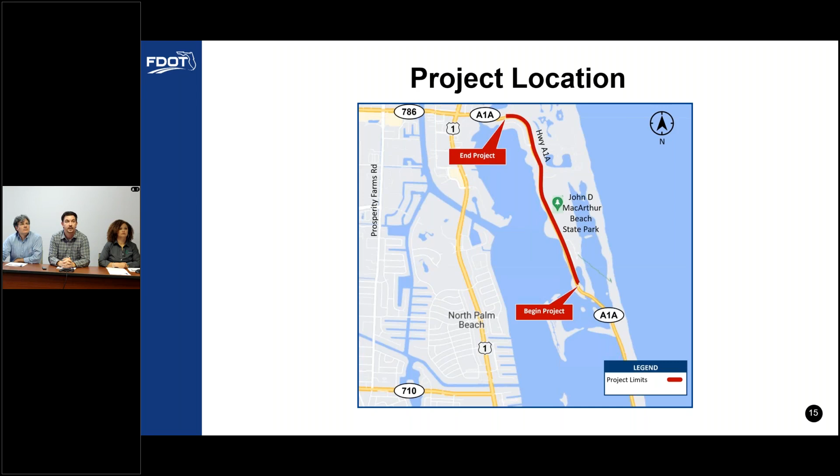Good evening, everyone. My name is Tyler Wallen, and I am the engineer of record for this project. This slide shows the project limits along State Road A1A in Palm Beach County. The project begins south of John D. MacArthur entrance and ends just south of the Portage Landing North.

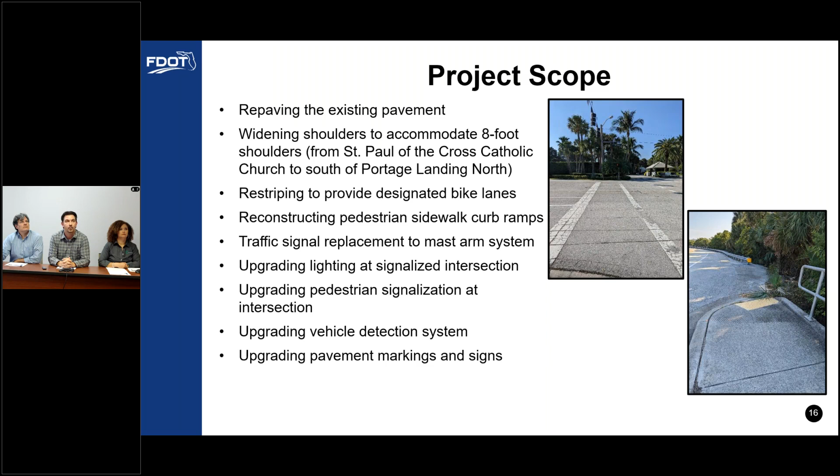Here is a brief overview of the main items within the project scope. Proposed improvements include repaving the existing pavement, widening shoulders to accommodate 8-foot shoulders from the St. Paul of the Cross Catholic Church to south of Portage Landing North. We will be restriping to provide designated bike lanes throughout the corridor. We will be reconstructing sidewalk and curb ramps as needed. At the intersection of State Road A1A and Lost Tree Village Old Harbour Road, we will be upgrading the lighting, the pedestrian signalization, vehicle detection system, and the existing traffic signals to a mast arm system. In addition, along the corridor, we will be upgrading pavement markings and signs.

We will now go over key aspects of the project design plans. First, we will cover the existing and proposed roadway sections, and then we will go over some examples of the proposed improvements.

This is showing the existing roadway section 1 in the vicinity south of John D. MacArthur Park entrance. This section of State Road A1A has two 12-foot undivided travel lanes, a 5-foot paved shoulder in the northbound direction, a 4-foot bicycle lane with curb and gutter, and a 6-foot concrete sidewalk in the southbound direction.

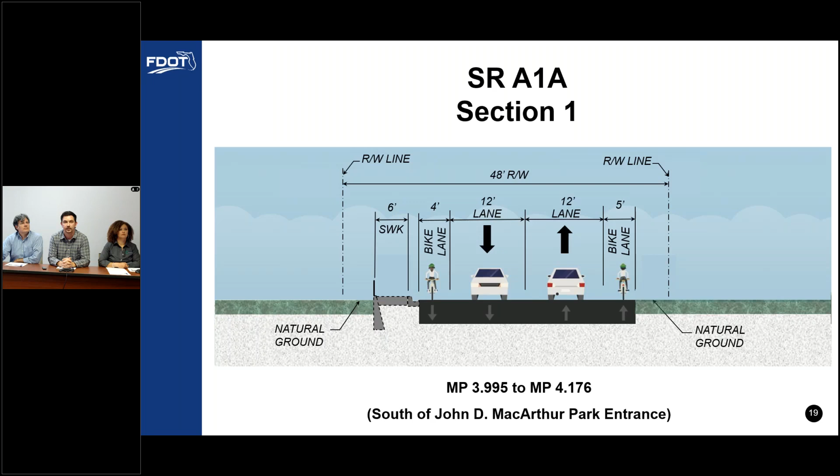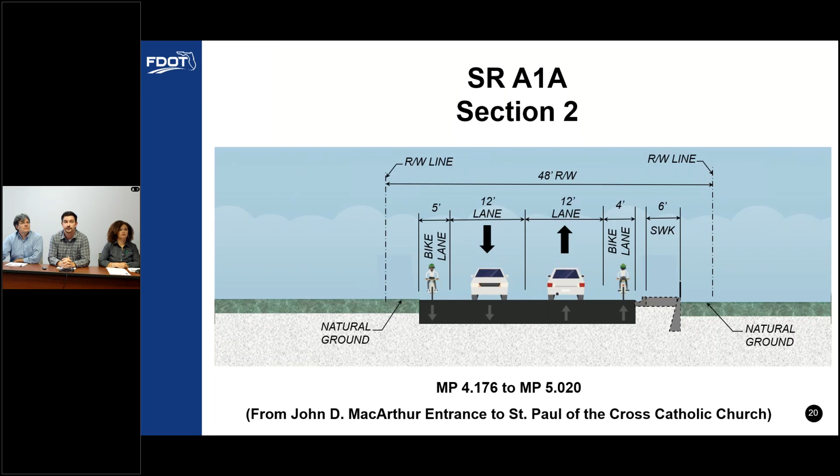This is showing the existing roadway section 2 from John D. MacArthur Park entrance to the St. Paul of the Cross Catholic Church. This section of State Road A1A has two 12-foot undivided travel lanes, a 5-foot paved shoulder in the southbound direction, and a 4-foot bicycle lane with curb and gutter and 6-foot concrete sidewalk in the northbound direction.

This is showing the proposed roadway section 3 from St. Paul of the Cross Catholic Church to south of Portage Landing North. The existing section of State Road A1A has two 12-foot undivided travel lanes and 5-foot paved shoulders, which are being widened to 8 feet in both the northbound and southbound directions.

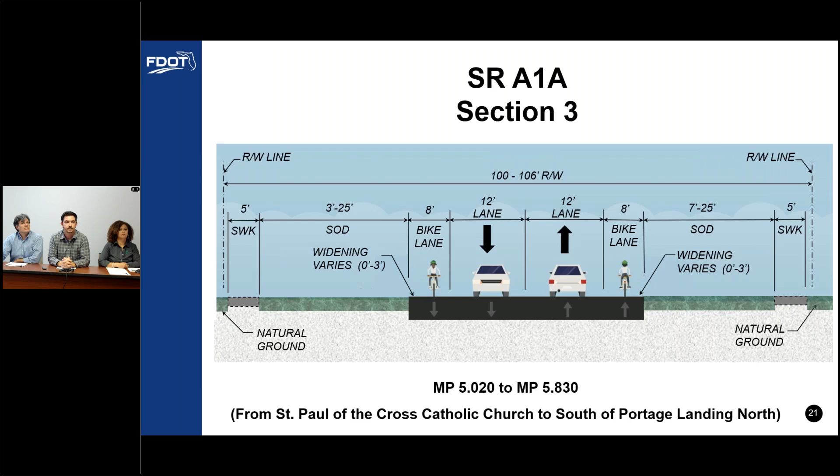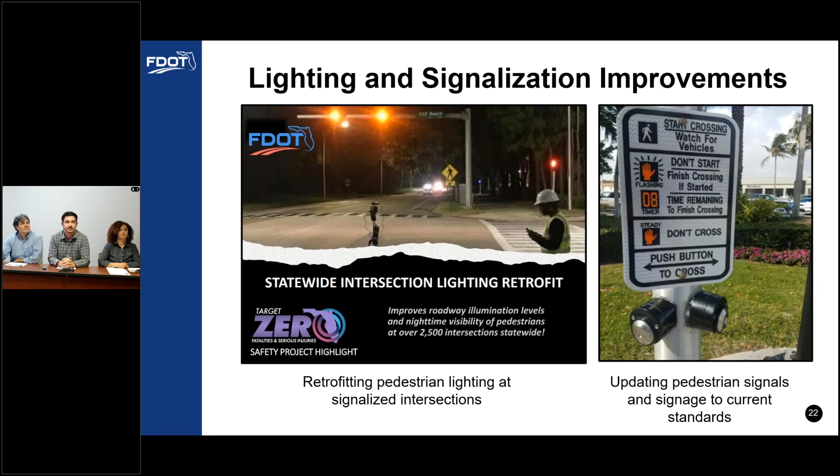This shows the proposed lighting and signalization. The image on the left shows an example of what the increased lighting levels will look like, and this will be done at the signalized intersection of State Road A1A and Lost Tree Village, Old Harbour Road. The image to the right is showing the updated pedestrian signal push button detectors, along with signage giving instructions how to operate the signals. These improvements provide traffic safety for vehicle and pedestrian users.

This shows additional signalization improvements. The image on the left shows the proposed mast arm system to be installed at the intersection of State Road A1A and Lost Tree Village and Old Harbour Road. The image on the right shows video detection cameras that will be installed on the proposed mast arms. These cameras are for signals to detect when vehicles are stopped at the light.

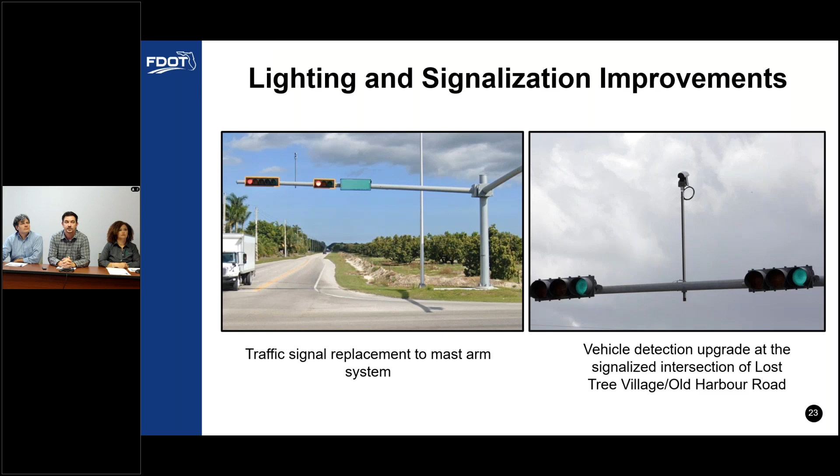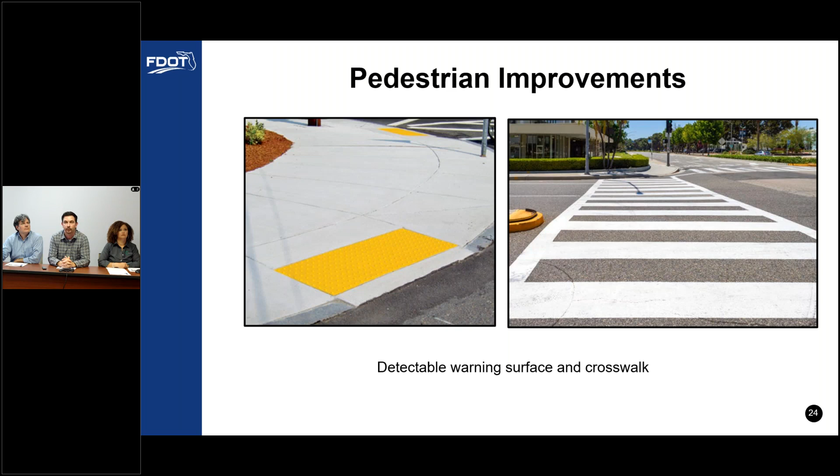We will now go over some of the construction impacts.

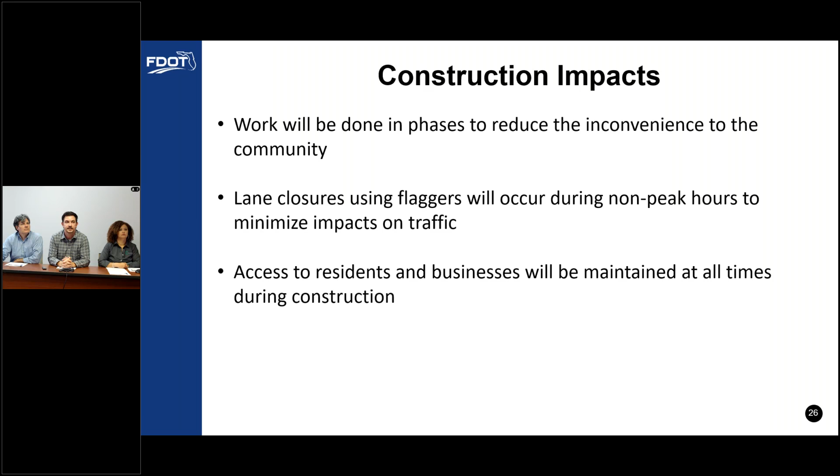This is a list of some of the key considerations in our maintenance of traffic plan. Work will be done in phases to reduce the inconvenience to the community. Lane closures for resurfacing activities will use flaggers during non-peak hours to minimize impacts to traffic. Access to residents and businesses will be maintained at all times during construction.

Phase 1 will construct the southbound direction, including sidewalk repair, curb ramp construction, and widening of the shoulders. Phase 2 will construct improvements in the northbound direction, including the sidewalk repair, curb ramp construction, and widening of the shoulders.

Phase 3 will consist of milling and resurfacing of the roadway pavement and shoulders, as well as the final signage and pavement markings. This phase will consist of two subphases. Phase 3A will temporarily close the southbound direction with the use of flaggers to mill and resurface the roadway and shoulders. Phase 3B will temporarily close the northbound direction with the use of flaggers to mill and resurface the roadway and shoulders.